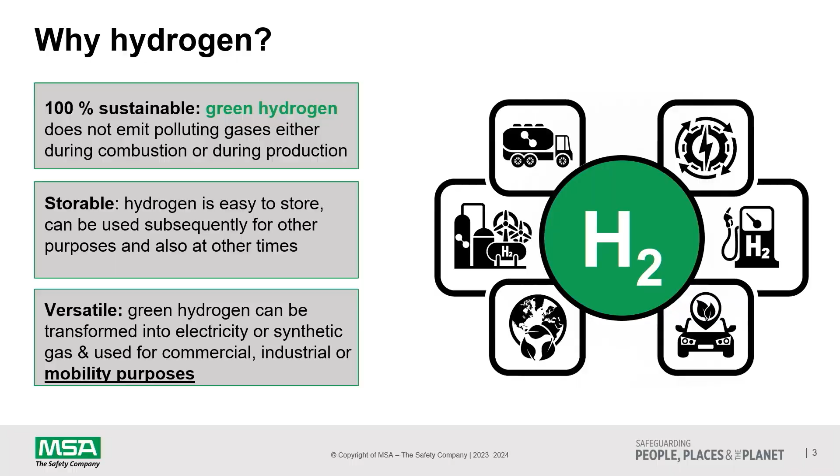So, hydrogen compared with common fuels. There's hydrogen, propane, gasoline and gasoline vapor, and methane. By the way, gasoline is usually liquid, but dangerous is a mix between vapor and air. That's the most dangerous combination for gasoline vapor.

Explosive level range. This is a range between LEL, the lower explosion limit, and UEL, the upper explosion limit. This range is most dangerous because the gas can explode. The explosive range for methane is from 4.4 volume percent to 16.5 volume percent. That is small. But for hydrogen the range is 4 volume percent to 77 volume percent. Please note, 77 is a very big range. So this is a high risk potential, definitely.

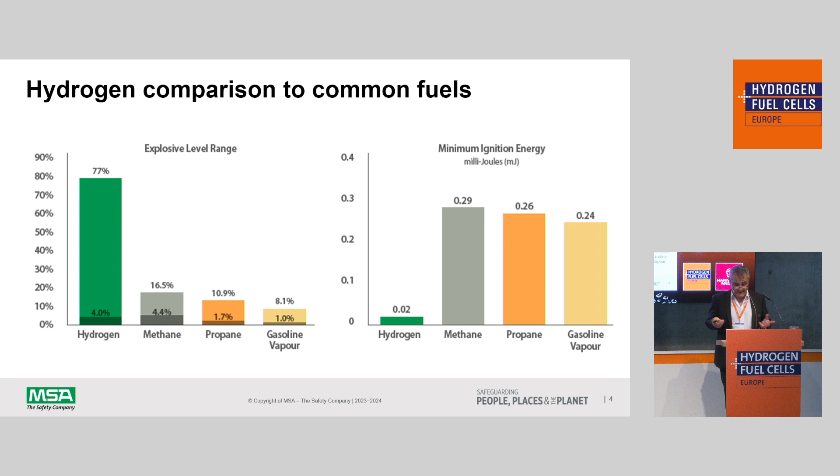The second comparison is ignition energy. For hydrogen the ignition energy is 0.02 millijoules, and for methane 0.29 millijoules. This ignition energy for hydrogen is less by a power of 10 against methane, very small. It's a risk potential too.

Next comparison. Hydrogen compared with common fuels, gasoline and LNG, regarding leak rate. The leak rate for hydrogen is significantly higher than gasoline and LNG because of the gaseous state and the structure of the hydrogen molecules.

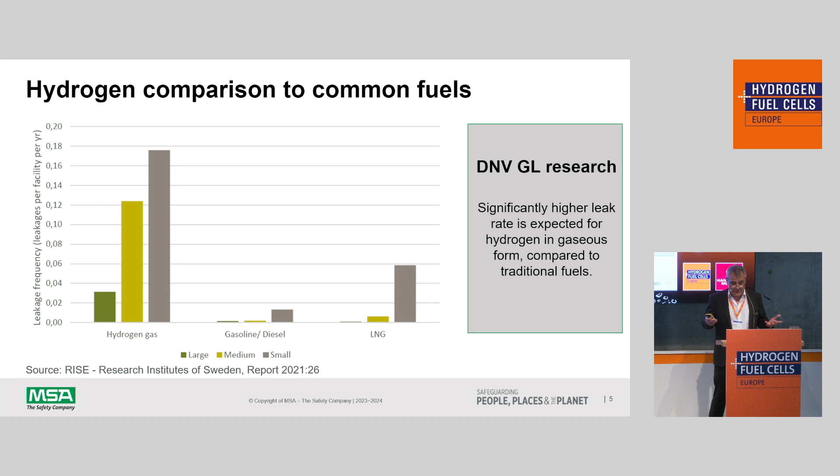So decarbonization of transport can happen with H2. In my opinion, for trucks this is the best solution, for cars partially. And with many fueling stations planned in public areas, we address the public safety concerns by complying with the ISO 19880-1 requirements for gas and flame detection. ISO is the International Organization for Standardization. And the ISO standard 19880-1 is a standard for gaseous hydrogen fueling stations.

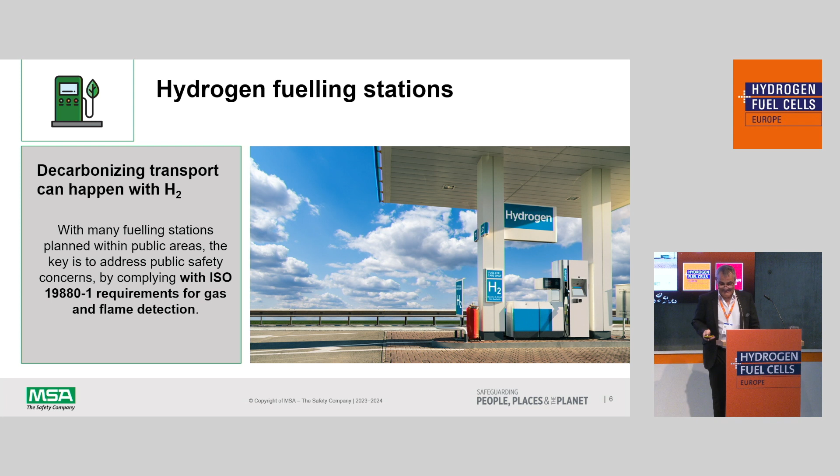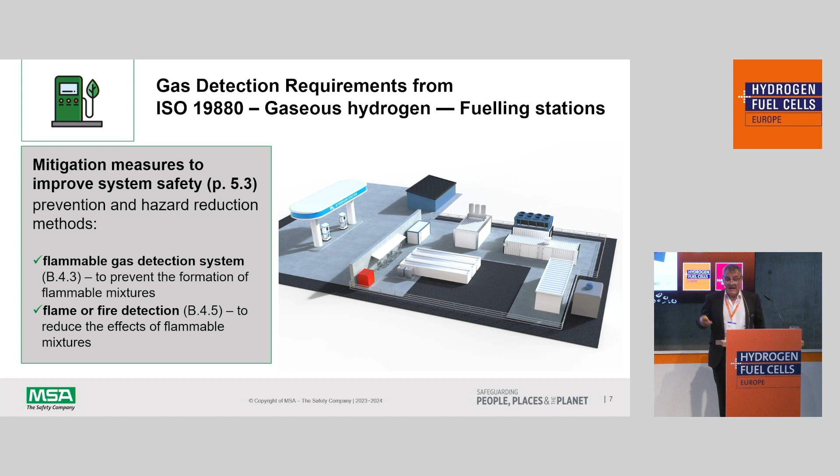From now, the ISO standard, too many figures. Gas and flame detection for hydrogen fueling stations are mentioned and required for protection of people and equipment in the ISO standard. The purpose is to avoid flammable mixtures of gas and air and escalation in the case of a fire. Hydrogen gas and flame detection is described in detail in these parts of the ISO standard, as you can see.

This is implemented in an example for the complete monitoring of a fueling station. The basis is a risk assessment from the operator in combination with the ISO standard. You can see here 10 gas detection measuring points are installed. These are the green points. 2 measuring points outside near the dispensers and 8 measuring points inside in rooms or containers for monitoring of electrolyzers, analyzers, instruments, etc.

Additionally, 1 ultrasonic gas leak detection measuring point is installed outside. That's the blue point. This detector monitors the pipes and the equipment outside. The 5 flame detectors are installed outside to monitor the dispensers and the complete hazardous area. These are the red points.

And the safety of the fueling is guaranteed because of covering the ISO standard and the complete solution with gas, leak, and fire detection. Hearing, smelling, seeing. By the way, in gas detection, 100% safety is never possible. But this concept, this solution is very safe.

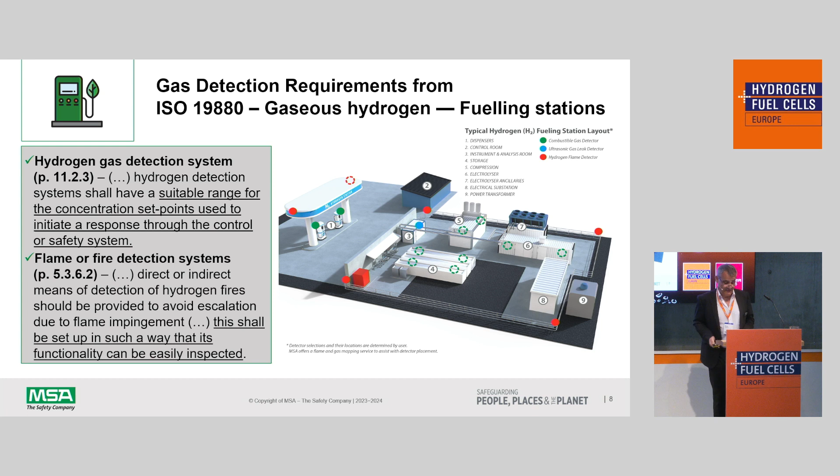So, yeah, the devices. Gas detection. Gas detection we implement with catalytic gas detectors for the measuring range 0 to 100% LEL, and with EC cells, or electrochemical cells, for the detection in the ppm range, for example 0 to 1000 ppm. ppm is parts per million. Standard is 0 to 100% LEL.

Hydrogen has an LEL of 4 volume percent. For comparison, 1 volume percent corresponds to 10,000 ppm, parts per million. This is a completely different level.

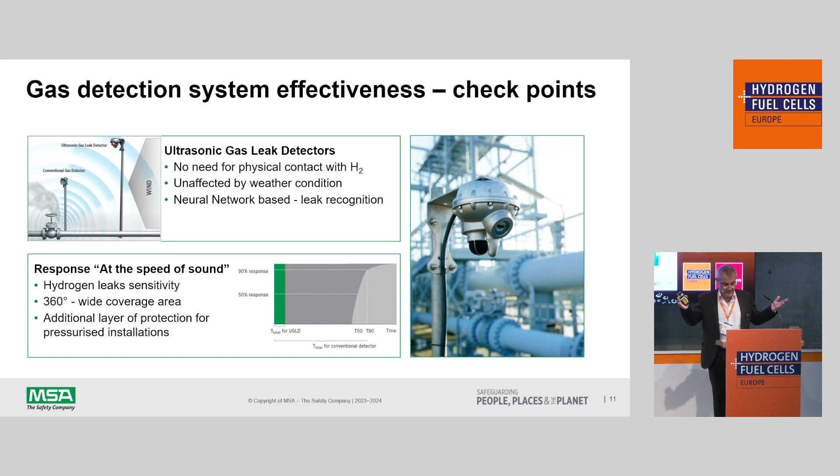So this measuring principle is independent from weather conditions: rain, snow, fog. And as said, it can hear. So the flame detector can see, and the gas detector can smell. Smelling, seeing, hearing.

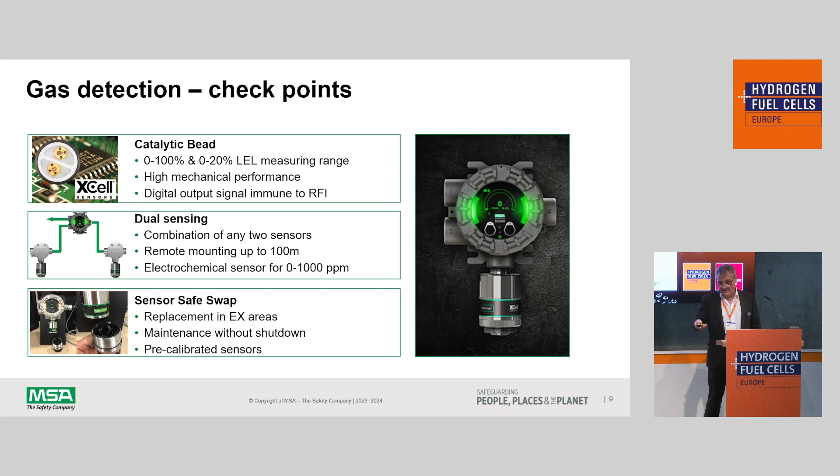And these 3 fixed gas and flame detection techniques are very effective for hydrogen gas detection and fire response, as indicated by the ISO standard. So they are very effective for prevention in combination together, depending on the application. So the quick response to H2 leaks and H2 fires with diversified technologies will improve the safety of fueling applications in general.

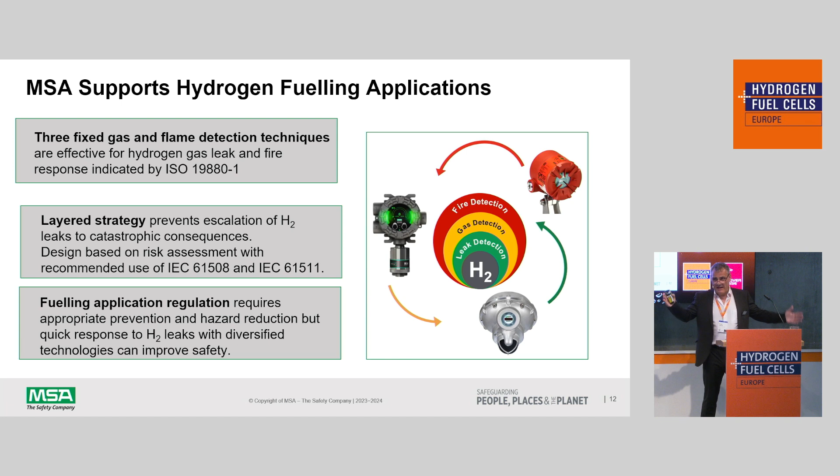So, are there any questions from the audience, or any of you concerned with safety? I see a gentleman over here. I'll bring the mic to you. Please. Can you give some information on the range, the distance of detection of your detectors?

The ultrasonic detector has a range for the standard sensitivity of 70 meters and for the highest sensitivity of 29-30 meters. The flame detector has a range of approximately 50 meters, and the gas detector depends on the application, but we say one gas detector can cover an area of 25 square meters, approximately.

All right. Any other questions from the audience? Maybe I have one more question. So, if you were to compare hydrogen vehicles to other vehicles, what do you think are the safer options? What do you mean? So if we compare a hydrogen vehicle, a fuel cell vehicle, to, let's say, a gasoline or a battery-powered vehicle, what do you think are the safety concerns?